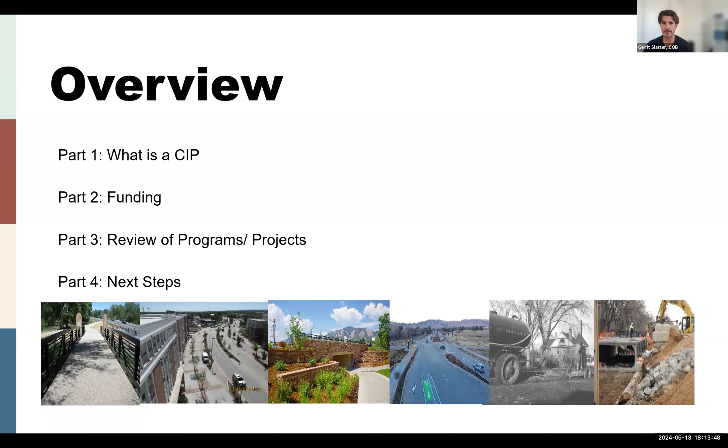So we are here to talk about what the capital improvement program is and how it differs from the annual budget, how it's funded. Then we'll provide an overview of the projects and programs that reside in the capital improvement program, and then what our next steps will be as we go through the process this spring and early summer.

So the capital improvement program is how we bring to fruition all the variety of projects and major programs that you see happening around the city.

And I relate the capital improvement program to home ownership. So you might think of our annual operating budget, which funds things such as filling potholes and snow response, general street maintenance, and traffic operation. Those are the sorts of things that are covered in your homeowner budget, such as grocery shopping and sweeping and removing the snow from your own sidewalk and so forth. But when it comes time to do a major replacement, maybe you need to replace the plumbing, or maybe you need to replace the roof, or maybe it's time to do an addition to the home because you need more space. Those are examples of what would be a capital expense.

And so when we go beyond routine maintenance of our system to major capital maintenance, or when we want to make an enhancement to our system, it falls to the capital improvement program to cause that to occur. And so we make investments in our system because we have billions of dollars of assets that are existing, and we've got ambitious ideas and visions and goals that we want to carry out and bring to fruition for our community. Projects and programs such as the Core Arterial Network and the Vision Zero Action Plan are all really critical goals that we've got, and the capital improvement program is the primary mechanism by which that will happen.

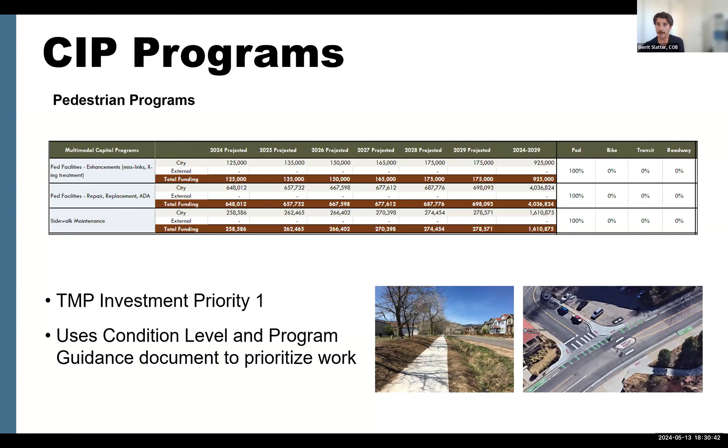Where we are unique is that we are one of a very, very small number of communities that actually participate with homeowners in making investments to upgrade the sidewalk, as well as having a proactive program that strives to bring our sidewalk facilities up to ADA compliance.

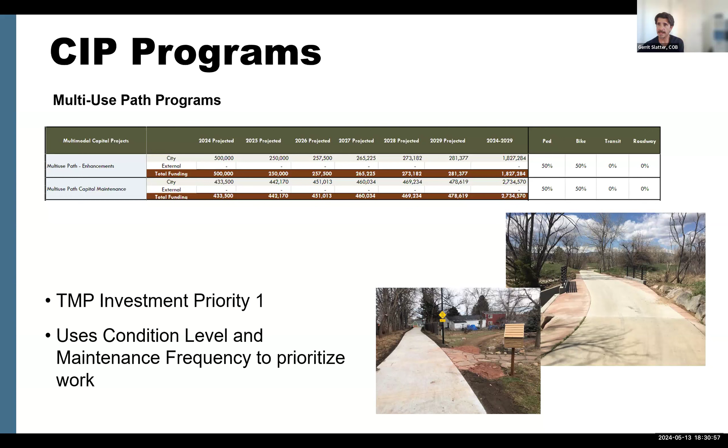The multi-use path program is, like I said, focused on taking care of repaving existing paths, as well as replacing pedestrian bridges, as well as making enhancements to the existing multi-use path system.

And then we have the bridge asset program that is responsible for taking care of the bridges and structures that are all over our transportation network, whether they're on the multi-use path or on the street system.

And when I talk about bridges and minor structures, typically we would think of things like the Broadway Bridge over Boulder Creek, or perhaps Folsom Bridge over Goose Creek, which are much larger structures.

And by transportation infrastructure definition, structures are actually anything larger than 4 feet in span.

And we have in the category of bridges between 4-foot span to 20-foot span, approximately 275 structures, which is a disproportionate number for a community of our size.

The reason for that is that we have 13 creeks and drainage ways that come out of the mountains, and we also have 17 irrigation ditches that flow out of the mountains. And so that means that we have a lot of streets crossing these waterways that we have to have culverts and structures to cross.

So a number of those structures are aging and in poor condition. And so we are spending money to try to keep those structures in good condition, because in addition to providing vehicular access, many of these streets are important travel ways for pedestrians and bicyclists and transit users.

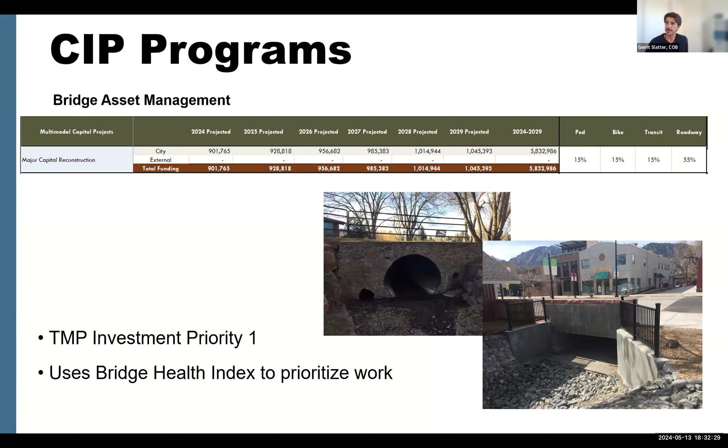All right, so that's an overview of the capital maintenance and multimodal enhancement programs. And I'm going to hand it now over to Brian Wiltshire. He's going to talk about some of the key projects that are in the 24 to 29 CIP.

An important designation here is that there might be some projects that are currently under construction that you don't see in here. And so Brian will talk about why that's the case. So Brian, are you queued up and ready to go?

I believe so. Can you hear me okay? Yes. Excellent. Okay. Thank you very much, Gerrit.

Good evening, everyone. My name is Brian Wiltshire, and I'm a civil engineering manager within the Transportation Mobility Group, primarily responsible for implementing the CIP projects. I'll be covering the Transportation CIP portion of tonight's presentation.

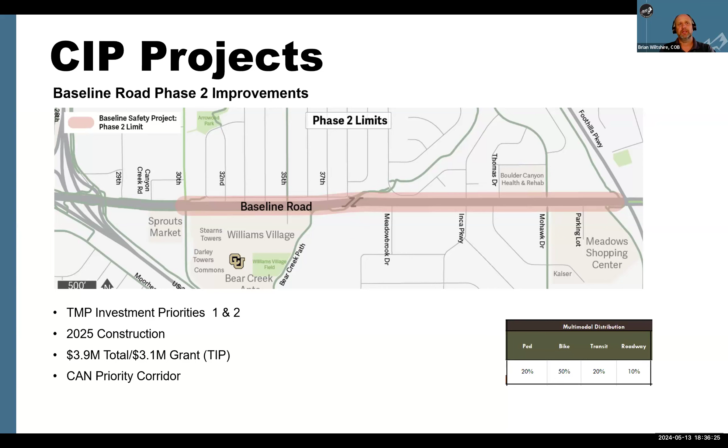The now completed first phase of work used city funds to begin installing safety improvements sooner from 28th Street to Foothills Parkway and on Mohawk from Baseline Road to Pawnee Drive. This included repaving and restriping the roadway, new concrete tall curbs to protect the bike lane at strategic locations, new or widened bike lane buffers, new crosswalk and corner islands, shortened pedestrian and bicycle crossing distances, and green bike lane markings.

The second project is the 30th Street preliminary design from Arapahoe to Iris. This project looks at the next segment of the 30th Street corridor. Previous improvement projects, the 30th and Colorado underpass and 30th Street bike lane improvements, came directly out of the 30th Street and Colorado Avenue corridors study project completed back in 2018. This current project also represents TMP investment priorities 1 and 2.

The engagement and design phase will occur in 2024 and 2025, with implementation projected for 2026 and beyond, using some of the recently awarded Safe Streets for All funding. This project is also part of the Core Arterial Network and a Safe Streets for All corridor.

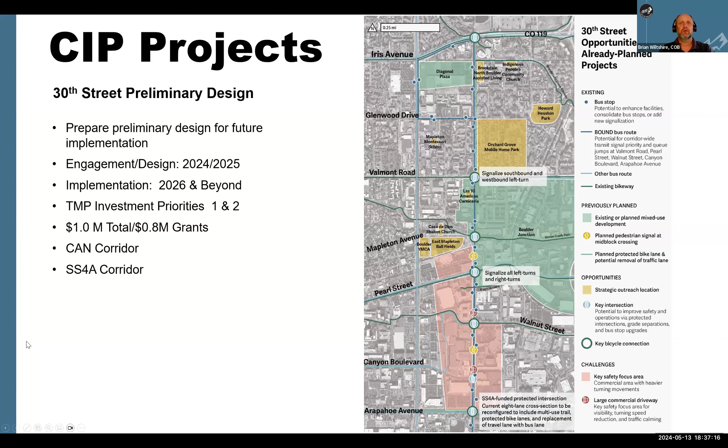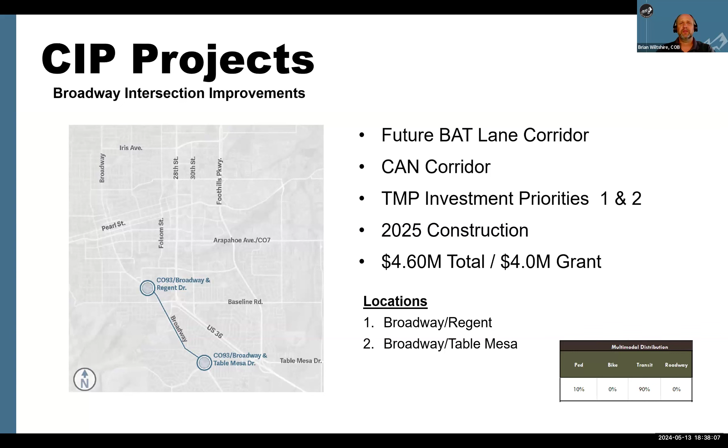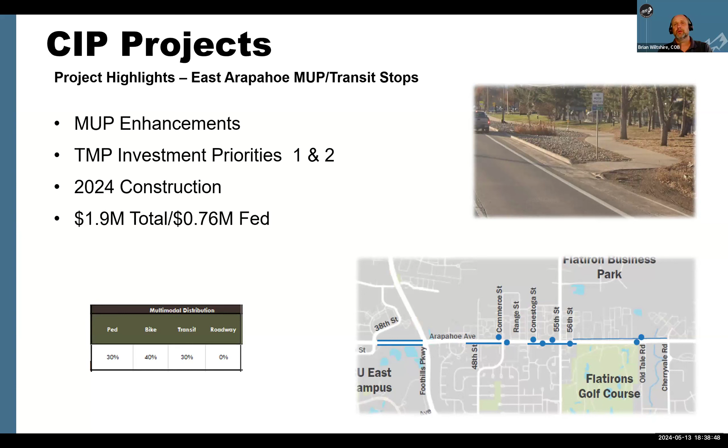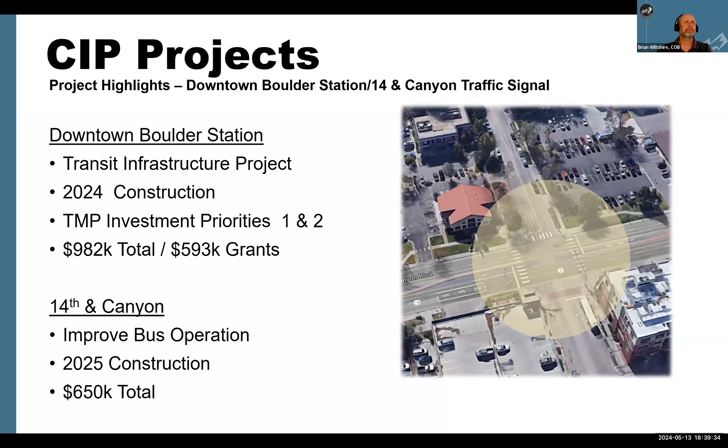So next steps are we will come back in June and present the draft 25 to 30 CIP. I wanted to say for the newer TAB members, I know this is a lot of information, and as Tila noted, it's a lot to absorb in a short time frame.

In years past, we have offered to meet with newer members in a smaller meeting if necessary to help facilitate the understanding so that you're feeling as informed as possible and contributing to the development and the recommendation of the CIP.

As Tila noted, I want to come back to that point just here ad hoc to say a number of the projects that we're building right now were approved by TAB members perhaps 5 or 6 years ago. So the work that you're doing now as part of the CIP 25 to 30 will not be realized until some of you have actually fulfilled your term and left the board, and it will be another set of board members asking why are we doing these sets of projects.

And it will be because you all have said this is what we think is important and where we should be spending our resources. So it's super important that we have you all involved and participating in this effort, and glad to have your attention on this.

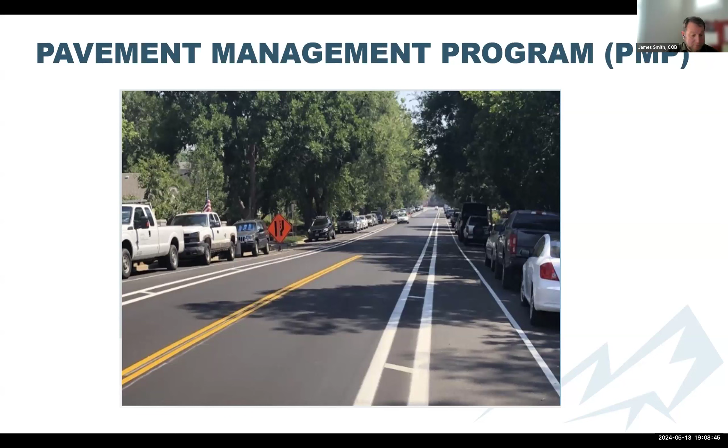The pavement management program was established by the Transportation Division to maintain Boulder's 300-mile street system in good condition. With this program, all streets are inspected on a 3-year interval to maintain awareness of existing conditions and guide where pavement rehabilitation work will be made in future years.

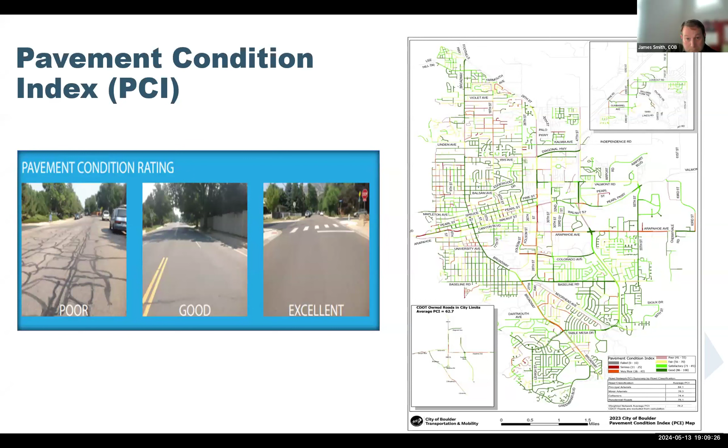With these inspections, our streets are rated on the Pavement Condition Index scale. The PCI is a numerical rating system commonly used by transportation agencies to indicate the general condition of pavement infrastructure. It's developed by the U.S. Army Corps of Engineers. The PCI is based on a visual survey of the number and types of distresses in a pavement. PCI ratings range from 0 to 100, with 100 representing the best possible conditions.

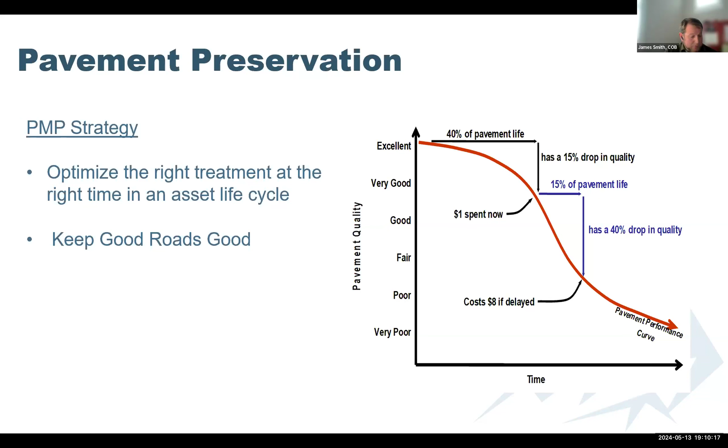Chip sealing is another common one that we do on our local, lower volume streets. It's a layer of sealant that goes down and then topped with a crushed stone. This extends our pavement life, could be up to 5 to 10 years.

The most common one is our asphalt resurfacing treatment. This is where we remove 2 or more inches of the existing asphalt and replace it with a fresh layer. We typically see a life extension of 15 to 20 years there.

Our most costly treatment is street reconstruction. This is the full removal of all asphalt and sometimes even the subgrade, reworking and placing it back. This is where streets are completely failed.

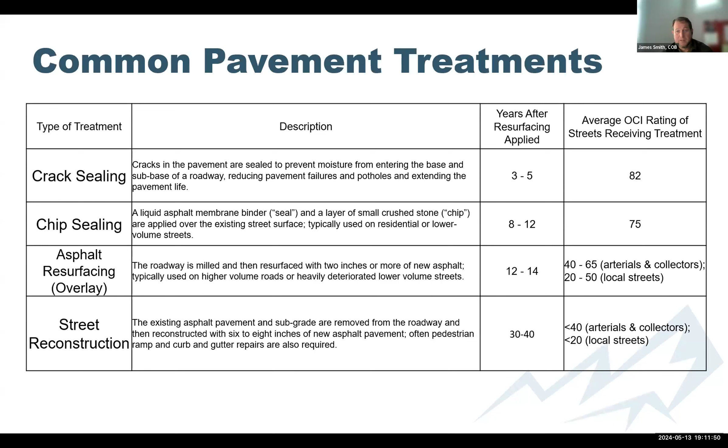Also, the PMP leverages outside resources, one of which being the Colorado Asphalt Pavement Association. They conduct a survey of all local agencies to see how much money they're spending and what their PCIs generally are. This helps us gauge where we're at, and we can see that we're in line with a lot of agencies and we have a pretty competitive PCI. Now I'll hand it over to Daniel for talking about how we're integrating the mobility enhancements.

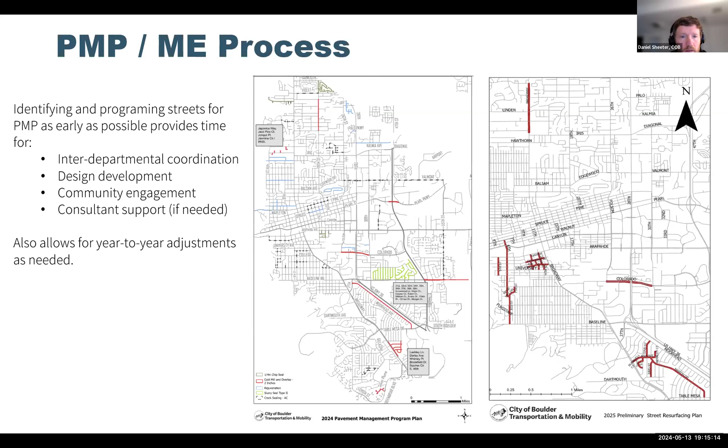So who doesn't love a good slideshow of before-and-after pictures? I'll walk through some examples of some recent mobility enhancements.

This first one is not a photo, but a screenshot of a striping plan for Balsam Avenue and Edgewood Drive. The Mobility Enhancements Initiative implemented a minor striping change to that corridor last year, designed in-house, to narrow vehicle lanes to standard widths and add a buffer to the westbound bike lane.

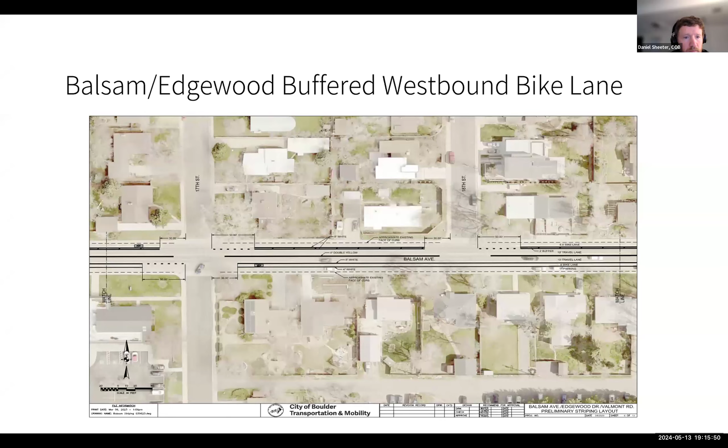The next project, which Brian mentioned, is the Baseline Road Transportation Safety Improvements Project. Initial phase 1 improvements were coordinated with repaving last summer and included installing segments of tall curb protected bike lanes between 30th and Foothills. Post-separated bike lanes were also implemented between 30th Street and the 28th Street/US 36 interchange as an upgrade to existing painted five-foot bike lanes.

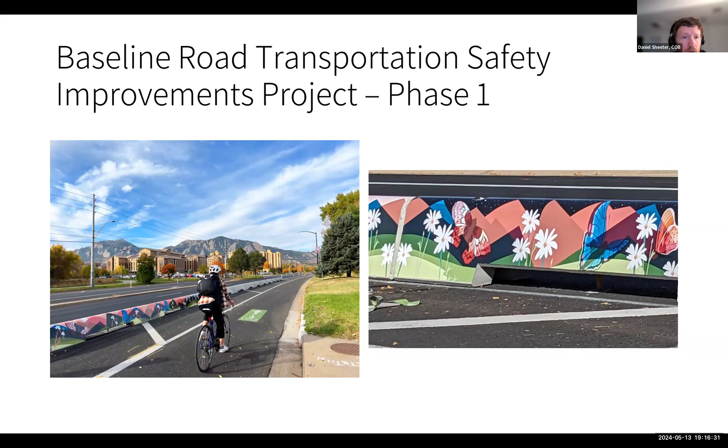The phase 1 project Brian mentioned is just east of 30th, between 30th and Foothills. These photos show that tall curb as well as some vinyl wraps with art from a local artist.

Continuing with Baseline, intersection tightening at side streets and a quick-build protected intersection at Baseline and Mohawk were also installed last summer. Many of these enhancements will be made permanent as part of the more comprehensive phase 2 project, which kicked off earlier this year.

The intersection tightening utilized paint and post treatments to slow the speed of turning vehicles and reduce conflicts between people biking and driving. The quick-build intersection improvements enhanced the north-south bikeway on Mohawk Drive and provide a dedicated space for people on bikes to wait or make turns at the intersection, as well as calmed speeds for turning vehicles.

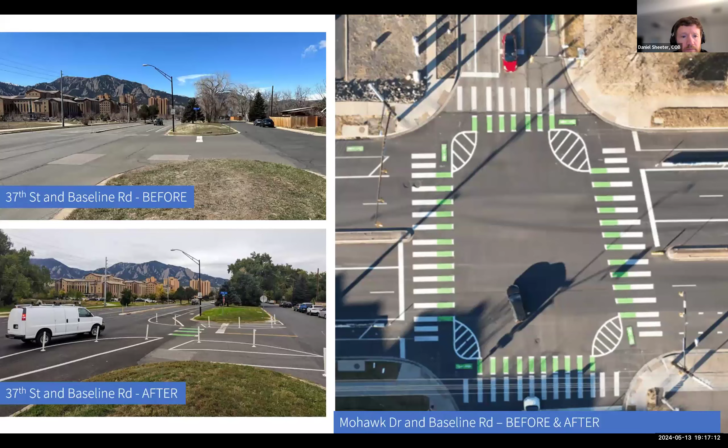The PMP also repairs many aspects of street infrastructure to bring it up to a state of good repair. These aren't technically categorized as mobility enhancements, but they do bring about safety benefits as well. In the case of Moorhead, this example is a before-and-after of a drainage inlet that was replaced and relocated out of the gutter pan, which improves the safety and comfort of the on-street bike lane there.

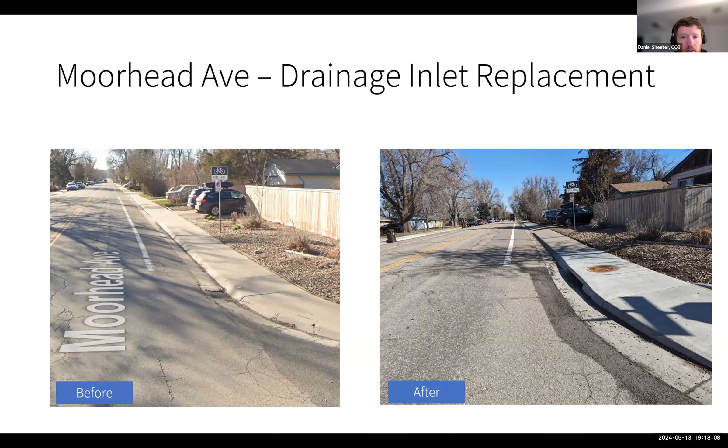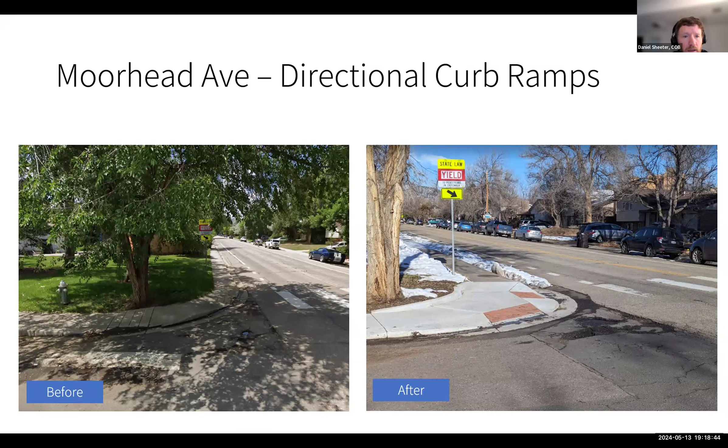Mobility enhancements are also coordinated with Americans with Disabilities Act, or ADA, improvements, including the reconstruction of curb ramps. In this case, you see an example of directional curb ramps installed along the corridor, as well as the detectable warning surface. In the before photo on the left, you can see there isn't ample space to wait at the existing curb ramps, and there weren't domes, those detectable warning surfaces, before. Now those are all brought up to ADA standards.

The final example was completed just a few weeks ago at the Broadway multi-use path underpass to Lashley Lane in South Boulder. As you can see in the photo at the top of the slide, the crossing lacked a receiving curb ramp on the east side of the street, and a small median island created a pinch point near the underpass opening. The crossing was upgraded to remove the median island, bulb out the east side sidewalk to shorten the crossing distance, and install a new curb ramp. Detectable warning surfaces were also added to the west side curb ramp, shown in the photo.

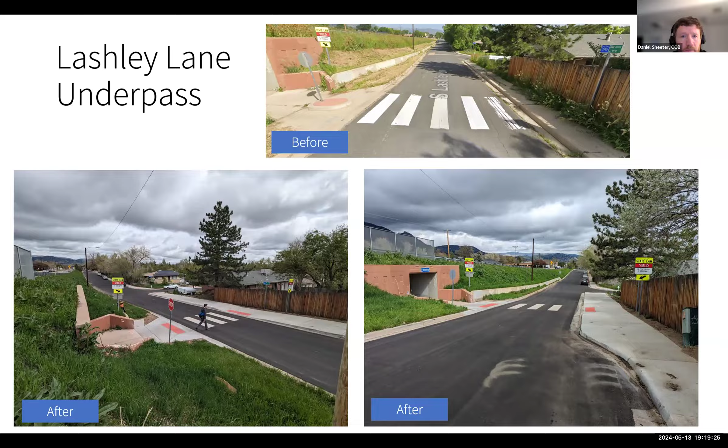So for 2024, we basically have two corridors for mobility enhancements this year. East Baseline will see mobility enhancements this year from Foothills Parkway to 55th Street. Operational enhancements are planned to improve multimodal travel and safety.

And for Moorhead, I shared some examples of the initial construction earlier in the presentation. The final phase of implementation will begin with repaving next week, weather dependent, and will include restriping and installation of speed cushions at the conclusion of resurfacing. And with that, Brian and I are happy to answer any questions you may have.

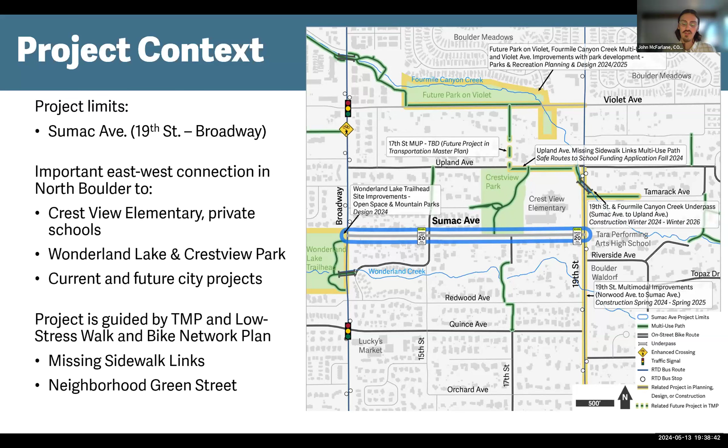Finally, the Sumac Avenue project is guided by the Transportation Master Plan, which identifies missing sidewalk links on Sumac. Currently, there is only a sidewalk on the north side of Sumac between 19th and the western edge of Crestview Park. The low stress walk and bike network plan also identifies Sumac as a neighborhood green street between 19th Street and 15th Street.

Due to poor local roadway drainage, discontinuous sidewalks, and deteriorating pavement conditions, the project's main focus when it began in 2019 was to address these needs. The project began in spring 2019, but was paused in early 2020 due to the COVID-19 pandemic and for staffing and financial reasons and constraints.

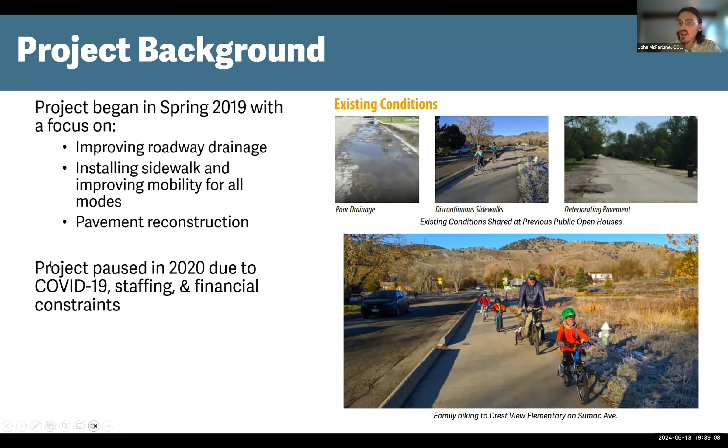Staff also began concept design and presented several high-level street design options for public feedback in February 2020. The design options focused on drainage, sidewalks, and on-street parking. During engagement, and in the 200-plus comments we received, we heard a strong preference from the community for curb and gutter drainage along the corridor, the need for a continuous sidewalk or multi-use path, and to preserve both on-street parking and landscaping where feasible.

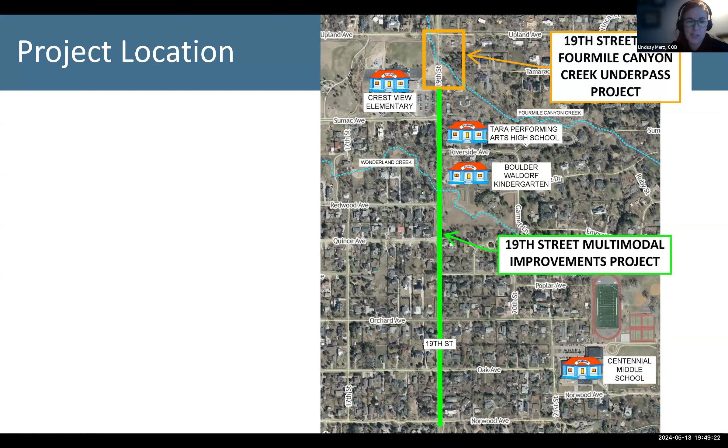Let me go through the scope of the project. We're going to install continuous sidewalks on both sides of 19th Street. We're going to upgrade the existing shoulder to buffered bike lanes, so on-street parking won't be there, but we'll put striped buffered bike lanes, similar to parts of Folsom. We're going to install traffic calming with speed cushions, and reduce the posted speed limit to 25 along that corridor between Norwood and Sumac. Then we're going to upgrade and install pedestrian curb ramps and crossing enhancements, and improve the RTD bus stops.

We're going to replace the Wonderland Creek box culvert. It's currently just a pipe, and it's going to become a much larger box culvert. And we're installing new storm sewer pipe and drainage inlets from Sumac down to Wonderland Creek.

For the construction timeline, the 19th Street Multimodal Improvements Project is just about to start. I believe tree removal starts the 22nd, so we're a week out from starting activity in this area between Norwood and Sumac. Construction will last until about August of next year. The underpass project started in March, and it's going to take a couple years, until February of 2026.

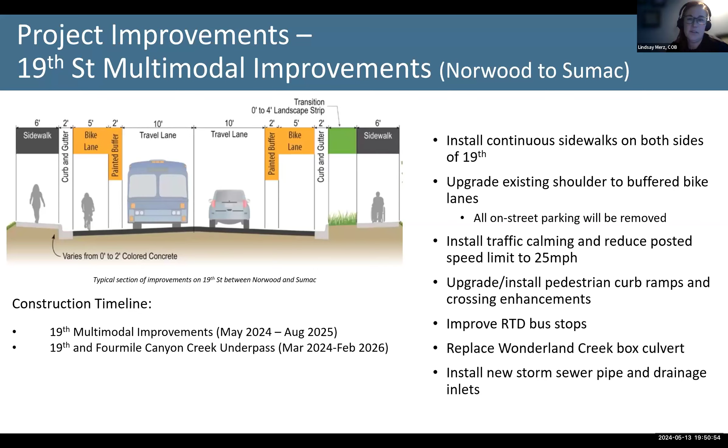We have a project website that actually has both projects on it. We also have a project phone number that covers both projects. We're using Boulder Cone Zones to advertise some of the impacts out there, and we're coordinating directly with the schools as impacts and different things change. So that wraps up the quick update on that one.

This is great news, this is a long time coming. Yeah, I was gonna jump in and just say that this is a huge milestone. Big congratulations to Lindsay on getting us to construction on this project. It has been a long time coming and kind of a hard road at times. So it's great. Yeah, thanks, Natalie.

Questions tab? Oh, Mike, go ahead, your yellow hand blends in with your background. I just raised it seconds ago.

So what is the situation there, is there anything that is like a bike lane there? And what would it take to get a protected bike lane there? Is that a budget increase when you do something like this?